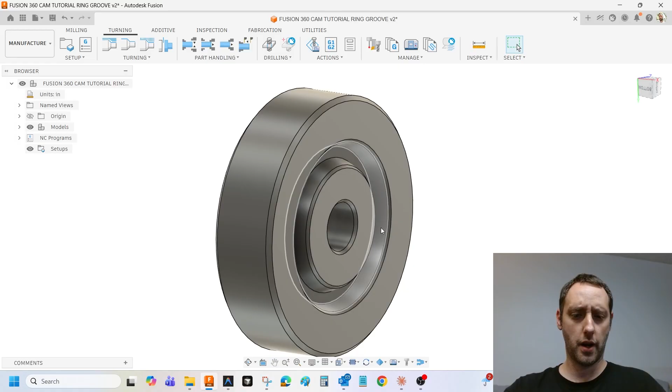Alright guys, so today we are going to make a ring groove. This is my part. This is my ring groove right here that we're going to make. And basically we're going to use a VNMG 332 and do a turning and roughing profile.

I'll just show you. We're going to use a turning profile roughing to rough it, and then we're going to finish it with a turning profile finishing.

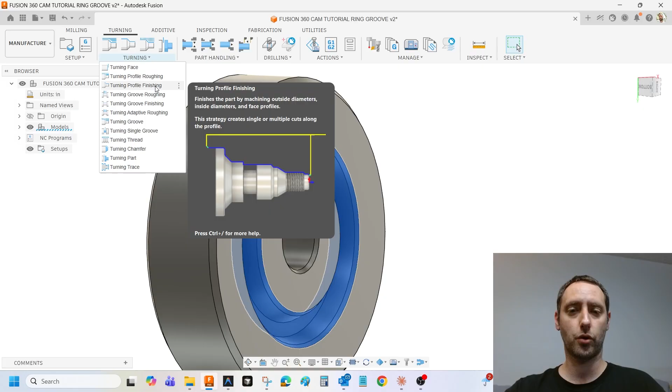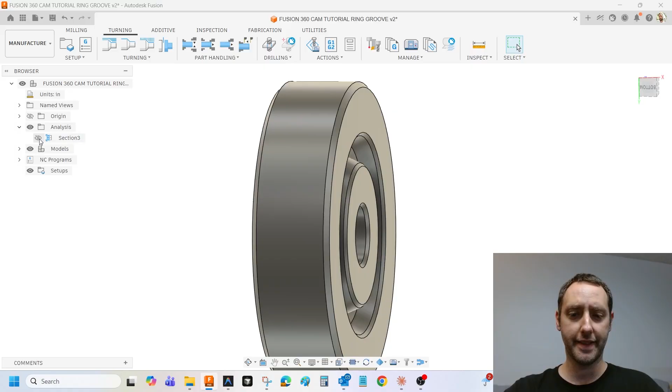What I like to do first is go to section analysis and view the cross section of the part, so we'll change that to 180 degrees off that plane. Now we can see the toolpath within the groove. The part is still solid. I can hide that or show it, but anyways, that's so you can see it better.

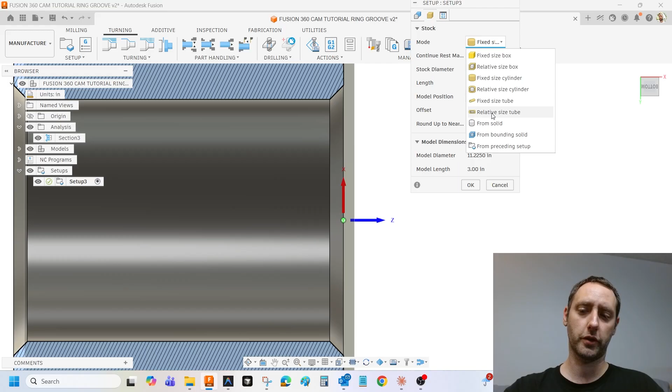Okay, so first thing we'll do is set up our stock. I'm going to select this face as my Z. We're in turning. I'm putting my origin on the model front right here. On my stock, for this example, we're going to go to relative size tube and put it at 0. We're going to name this, let's just name it ring groove.

Okay, so next thing we're going to do is create our roughing toolpath. I'm going to go to turning profile roughing. We're going to create a tool, so I'm going to go to add, then go to turning general.

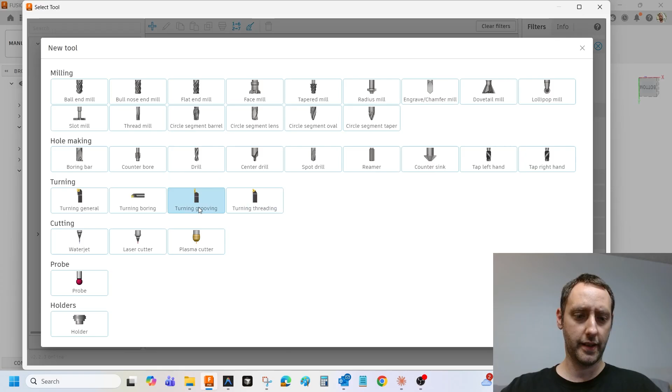We're going to make it a VNMG 332 neutral. The insert is going to be V, relief angle N, tolerance M, cross section G, insert size 3, thickness 3, and our radius is going to be 2.

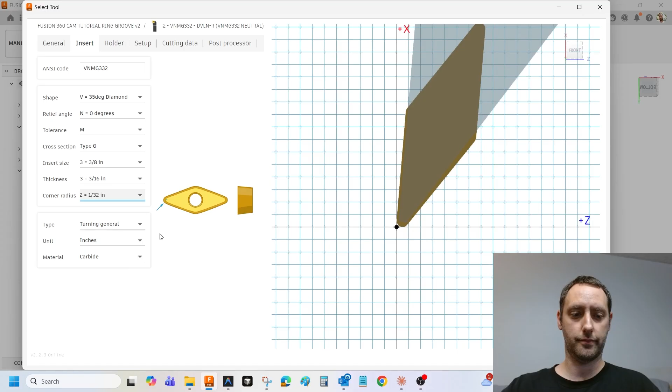So I'm going to go to the holder. I'm going to go under hand, it's that right hand or left hand, we're going to put it on neutral. And we're going to go to setup, and we are going to orientate this 90 degrees. And if we zoom out right here, we can see the tool. This is what it's going to look like.

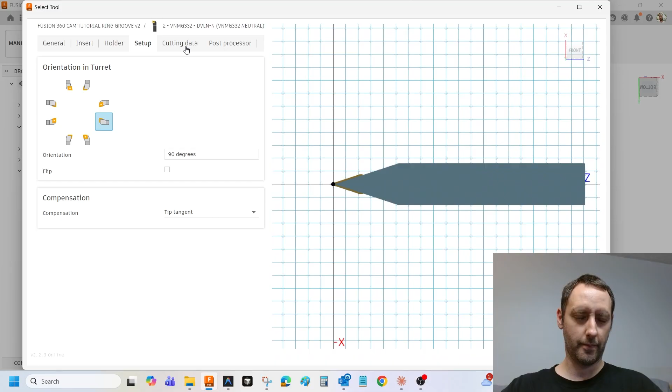Cutting data. Go 550, 5,000 feed rate. Tool 2 is fine, I'm going to select that.

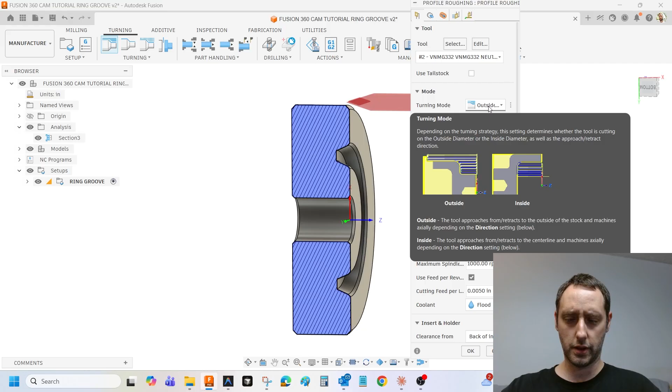So on this example, we're going to do outside roughing. Let's try it. Okay, so under geometry, I'm going to go to model front. My back is going to be selecting this wall right here, the bottom of the groove.

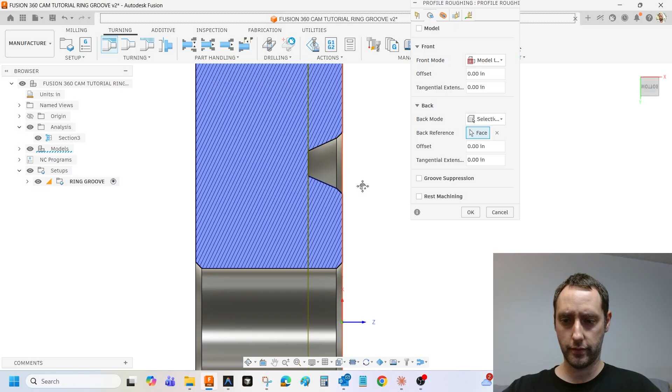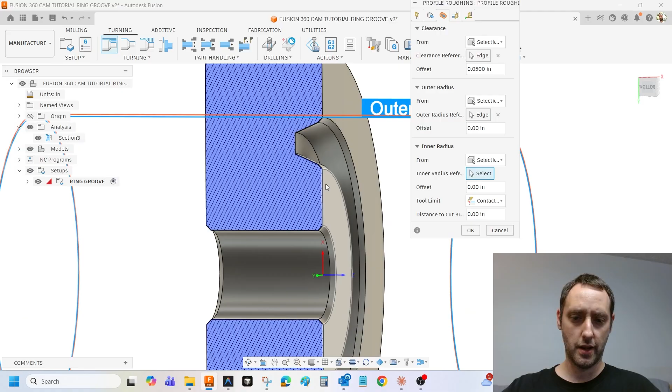I'm going to go to my radii tab. My clearance, we're going to put it on selection. I'm going to select this edge right here, we'll give it extra 50 thousandths. Outer radius, I'm going to put it on selection, I'm going to select this edge. Inner radius, I'm going to put it on selection, I'm going to select this inside edge.

Cycle type, we're going to put it vertical passes. Direction, let's put it both ways. Grooving, we're going to do allow radial and axial grooving. Your depth of cut, we're taking shallow passes because we're face grooving, so we're going to take 30 thousandths. Stock to leave, we'll do 2 thousandths, and we'll preserve high feed rate.

Approach and retract, we'll do safe Z. Approach X and retract, we'll do clearance. Let's hit OK.

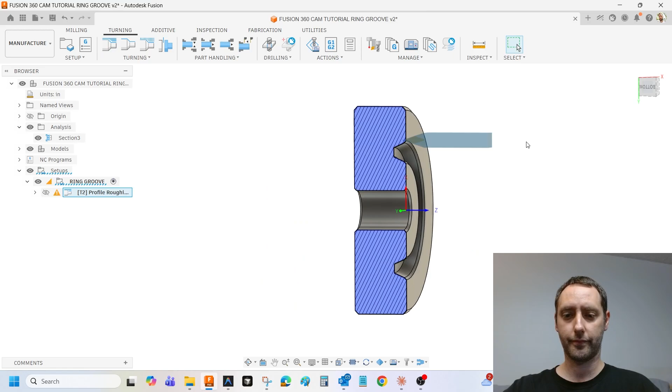Alright, let's go ahead and simulate this. So we get an error right here, you're going to get that invalid home position. I don't have a machine set up, and the tool orientation and everything, it doesn't really like that. But your code is going to be, it's just a warning.

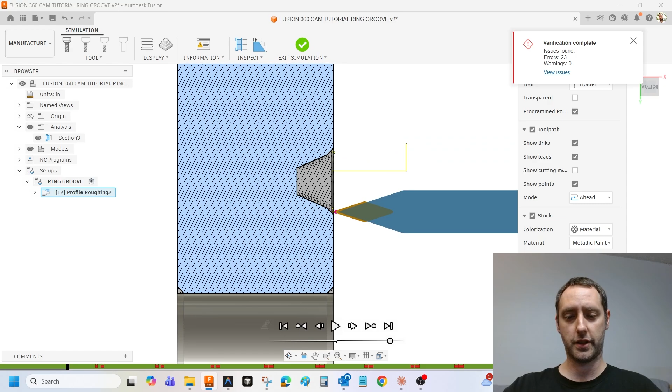Now this right here, error. So when you go simulate, notice it says errors 23, right? 23 errors. So what's going on? If I single block this, notice when I come back up right here, see how the tool turns red? What is happening is the bottom side of this tool is dragging on that face, okay?

So, and what you're going to have to do is, here, let's simulate this.

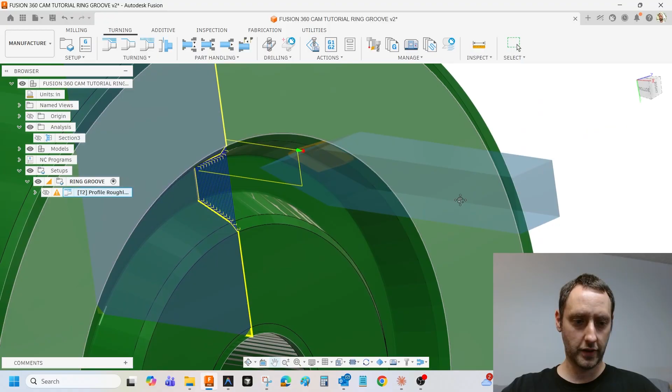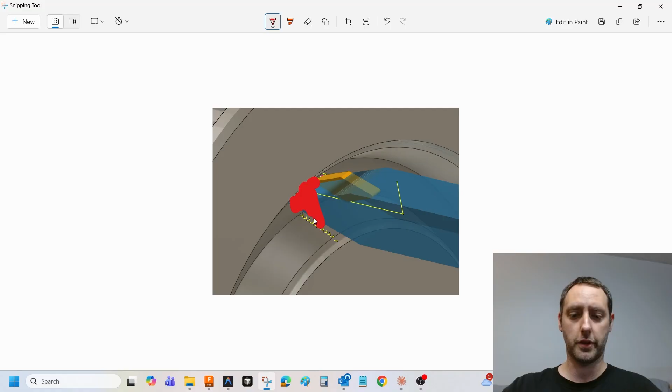All right, right here. It's a problem. So when it comes up, what you're gonna have to do is grind your tool down. So right here, you're gonna have to grind a clearance on your tool, and you may even have to do it on the insert a little bit right there, and that will keep your tool from dragging.

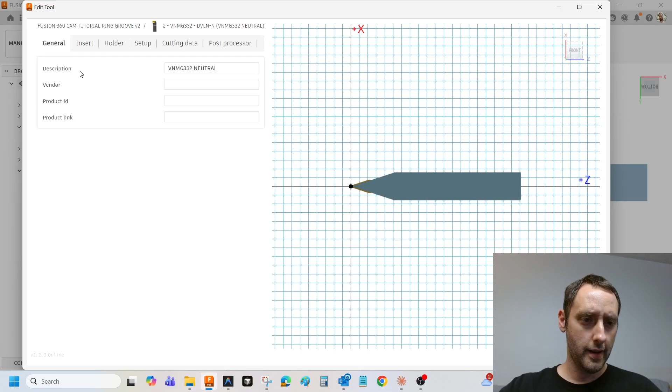But anyways, if you want to fix it in the simulator, it's gonna be the same tool path. It's not gonna really hurt anything. But if you really want to solve it, you go to Edit Tool, and on your holder, your shank height right here. By default, we get 0.8. For example, if I put 0.3, now obviously your tool is not going to be 0.3 height.

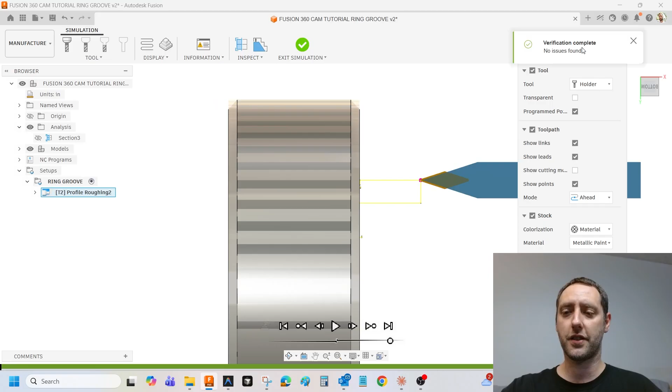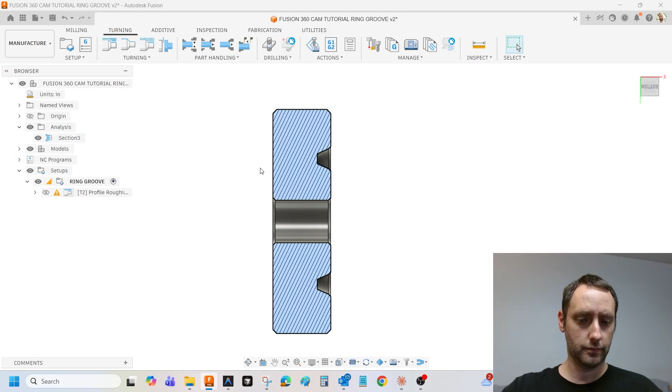But anyways, let's regenerate this. If I go to simulate it, notice verification complete, no issues found. So when I go to simulator right here, basically your tool is okay right there. It's going to be the same G code though, so I wouldn't even worry about it. Alright, so we're going to name that Ring Groove Rough.

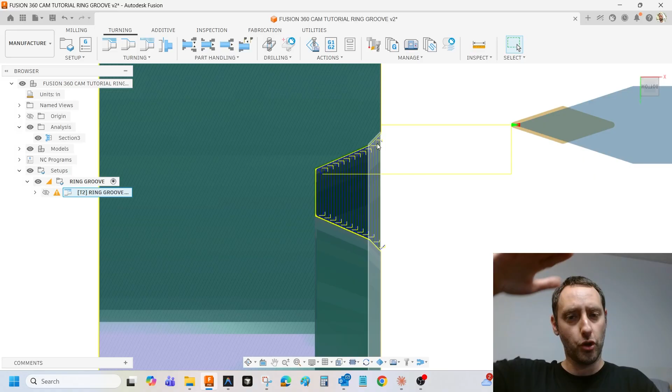Alright, so now we're going to finish it. We're going to do two finish passes: an outside finish and an inside finish. That will help you control the width of the ring groove. So I go turning profile finishing. I'm going to keep the same speeds and feeds. My mode right here, I'm going to put it on face profiling.

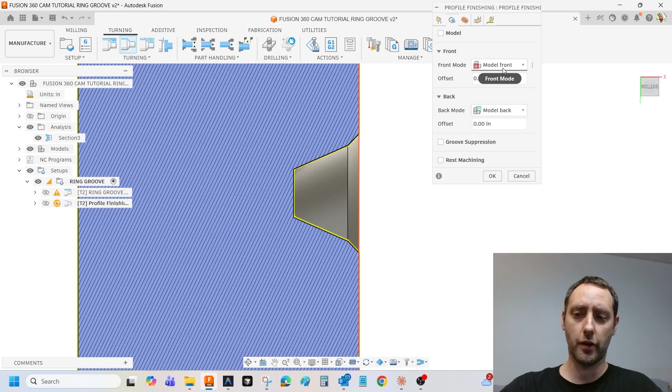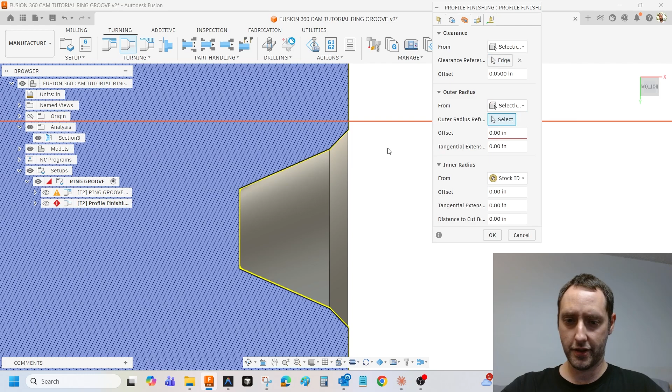My geometry, I'm going to put front mode, model front. Back, we're going to put it in selection. We're going to zoom in, select that face, that floor. I'm going to go radii. And we'll do the outside one first. So I'm going to put it in selection. I'm going to select this edge right here. We'll do 50 thousandths. Outer radius, I'm going to select the edge again.

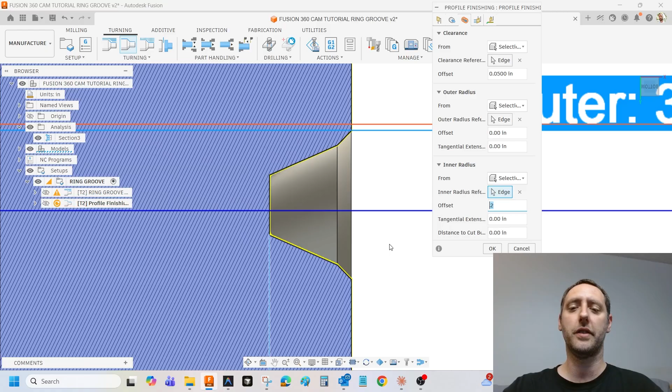And inner radius. So I'm not going to come all the way down. We're going to do this in two passes, okay? One for the outside, one for the inside. That's good right there. We'll offset it 200 thousandths. So we're going to go past the middle a little bit, and then when we do the inside, we'll go past the middle the other way.

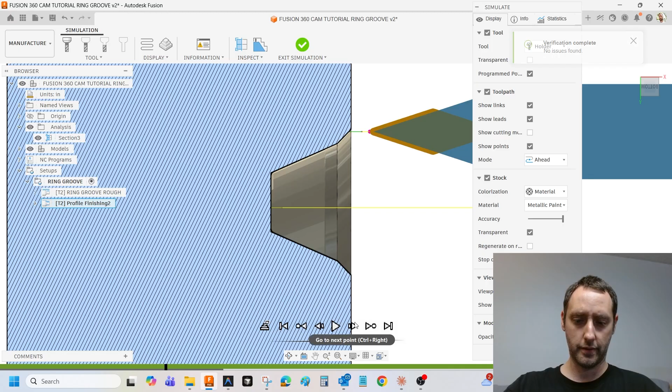So I'm going to go to passes. We'll do outside to inside. We'll allow radial grooving. No stock. I'm going to hit OK. Alright, so let's simulate this. Right click, and come down. Feed in. So come down, and it's going to come out, right? So if you look, it's going to stop right here. So we'll name that outside finish.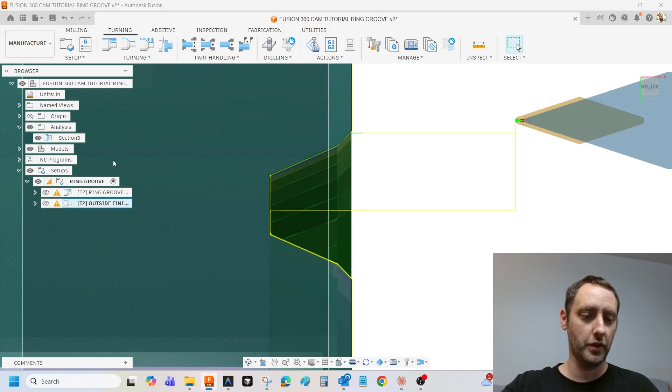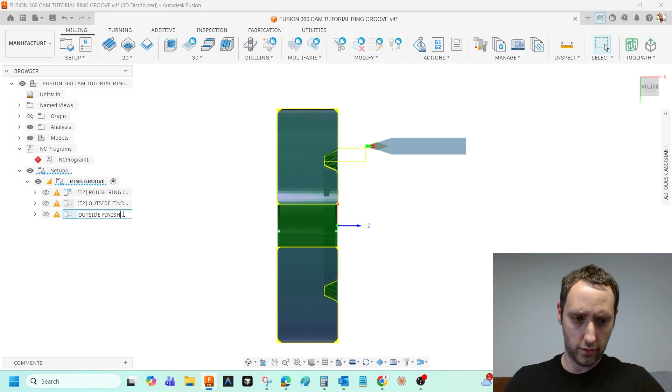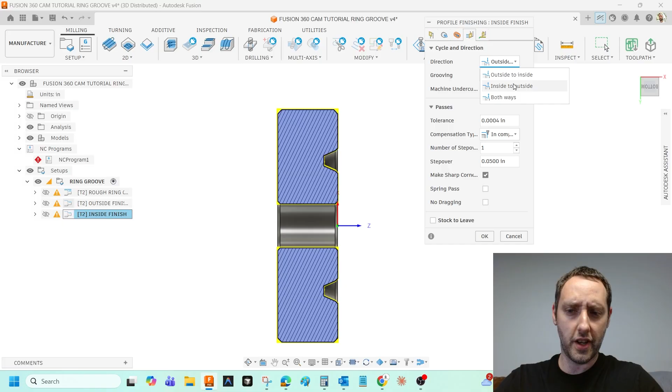All right, so the next thing we're going to do is finish the inside. So I'm going to duplicate this outside finish toolpath. Let's rename this inside finish. We're going to go to edit. We're going to keep all of our settings the same. And we're going to go to passes. We're going to change our outside to inside to inside to outside.

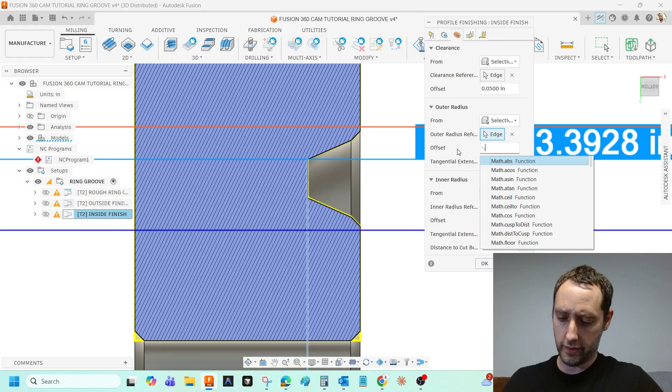Then the inner radius is going to be right here on this edge. The outer radius is going to be up here. Go minus 0.2. And let's try this out. Alright, so I'm going to right click, simulate. So then come in, come up, come out. Okay? Alright, let's check both of these finish passes here.

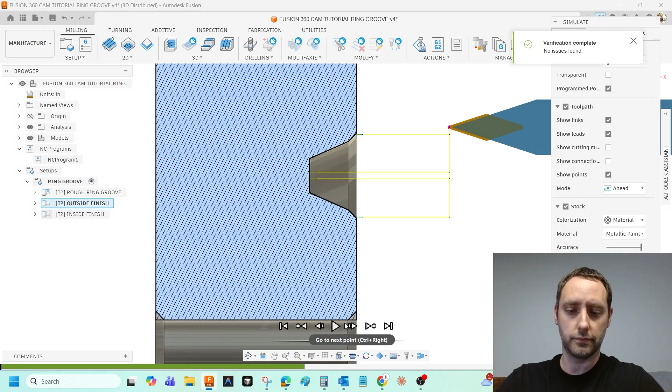Alright. Come in, come down. So it overlaps a little bit. You don't want to overlap too much. You can even reduce that some. Come down. Come in. And that's it.